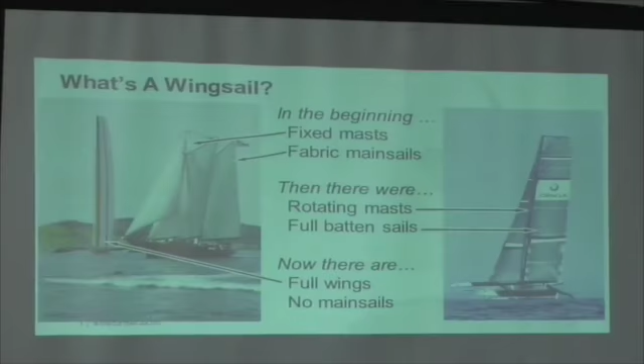So with a sloop rig, you basically have the mast, the mainsail, and the jib ahead of it. And then they went to basically taller cat rig, unit rigs, and the mast grew in size to be as much as 30% of the total sail area.

Then in the late 60s and early 70s, they started trying to make it more like an airplane wing, experimenting with a single piece wing that could be distorted to sail on both tacks. Then the real breakthrough came in the late 70s, where they went to rigid wings comprised of a number of symmetrical airfoils in tandem that, when deflected, formed slots.

These form slotted flaps just like you see on an airliner when it's landing. When you look out and see those, the wings sort of fall apart into a whole bunch of different pieces. That's what the wing is like on these C-class catamarans.

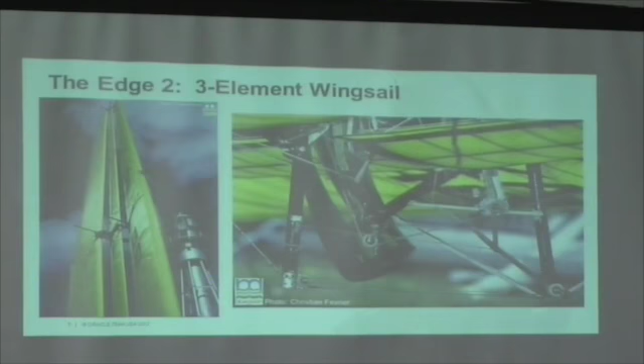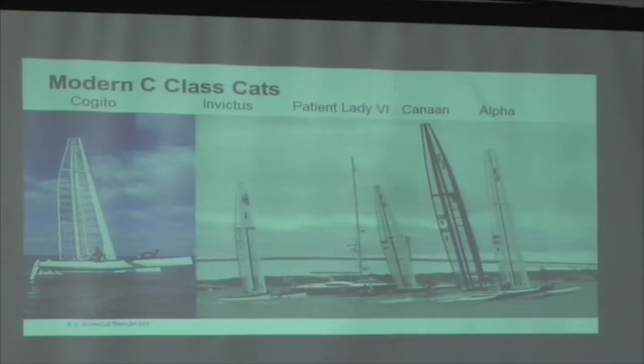And Canaan is the current holder of the C-Class championship - she's a Canadian boat. And Alpha is a little bit older Canadian boat that first won the championship from the United States and brought it to Canada.

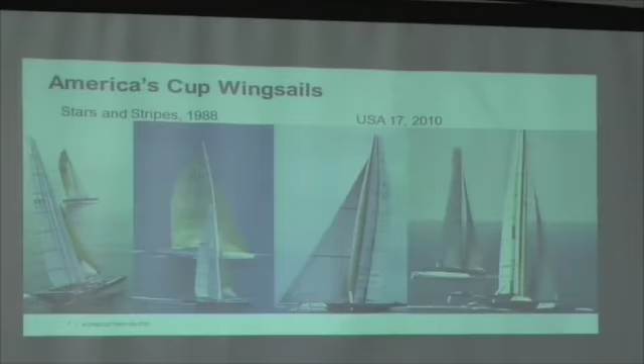In the front is the main element. It basically does the same role as the mast, and carries most of the lift. Behind it are the flaps, hinged just ahead of the main element trailing edge so they form a slot when deflected. The flaps are divided into several segments up and down the span, which makes it easier to assemble the wing, and they're individually controlled to control the twist.

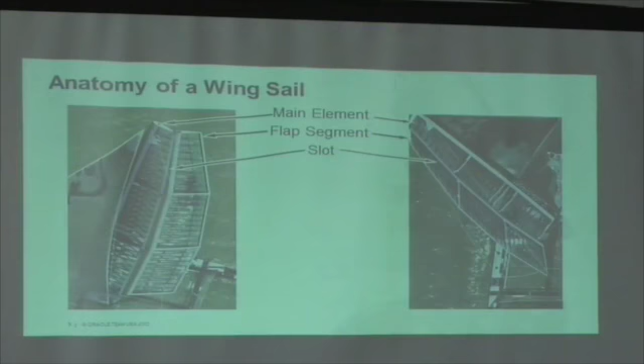Finally, the entire wing is rotated with what we call the traveler—really it's the sheet. The wing sits on a ball, just like on a Hobie cat, and the whole thing is rotated by the traveler. Because there isn't the high tension you have with the main sheet, and the traveler is just horizontal, it's very lightly loaded.

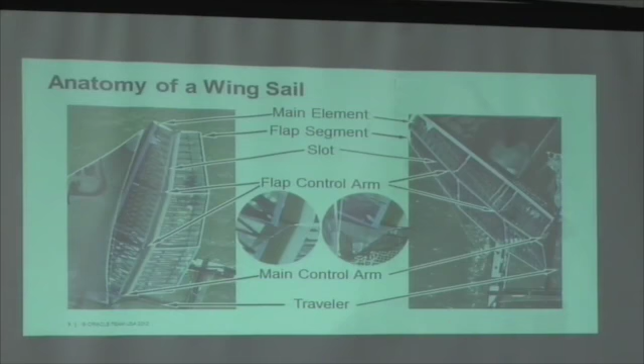Even on USA 17, it was just a 2-to-1 purchase to a fairly modest winch, and it's only a single purchase on the AC-45. So it's very easy to trim these wings in and out, and that's the key to making them highly maneuverable—you can turn the power on and off in an instant.

If you take the wing and slice it horizontally, shown in the upper left, you basically get these two teardrop sections shown here. The first is the main element, and the second is the flap. On some wings there's a third piece, which we call the tab, like a plane flap that can be articulated between the main element and the flap.

You can see in the second diagram how the slot is formed when the flap is deflected, and the tab can regulate the size of that slot. Not all wing sails have a tab—USA 17 did not, and the AC-45s do not. But I expect you'll see them on the AC-72s when those start sailing.

So you have basically 3 controls to the wing. You have the traveler rotating the entire wing, the camber control which controls the flap angle, and then twist, which is really the difference between the angles at the bottom and at the top. You can have twist in the flap, and you can have twist in the main element, though not all wings have the ability to twist the main element.

The AC-45s do not, and USA 17 did not. You may or may not see twist in the AC-72s—I don't know what these wings look like yet.

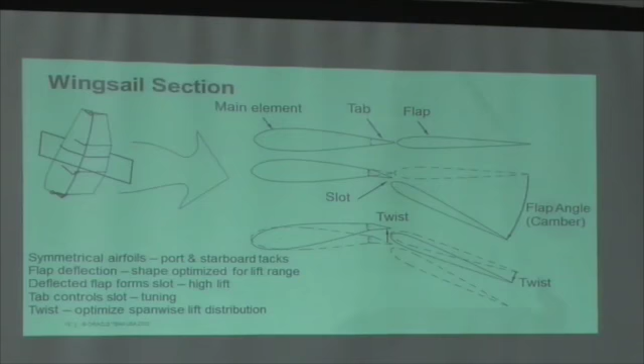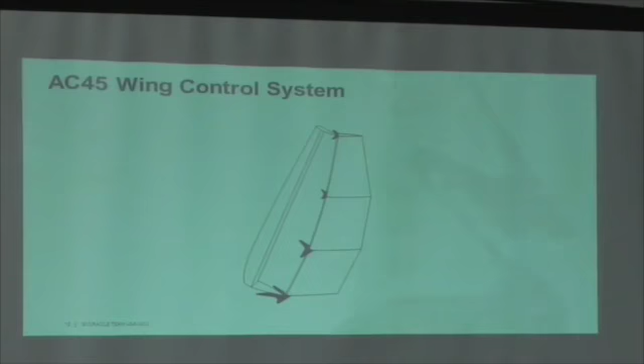Let's take a look at how the wing control system works. What I've shown is that same wing we saw in the helicopter shots. In this drawing, I've removed the frame so you can see the main spar and the control arms on both sides. At the bottom you have the main control arm, and at the end of each flap segment you have that flap's control arm.

Now the forces on the wing: you have the lift pushing sideways, restrained by the ball, by the stays, and by the traveler. These are all basically pulling sideways on the wing at the edges, and as a result, the wing just naturally wants to fold in half. But it's prevented from folding in half because there is a control line from the center of the main control arm to the main element, and that limits how far it can rotate.

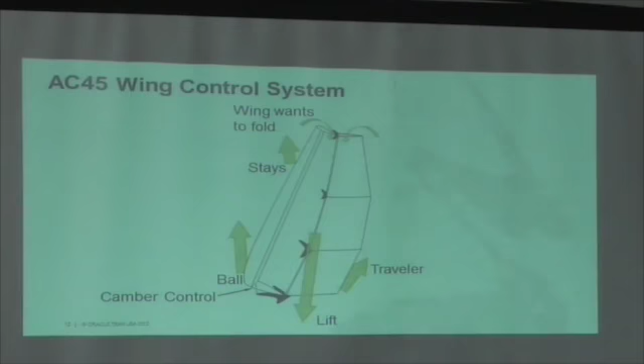That's how we control the camber—we simply regulate the length of that line. It just goes to a cleat, and the beauty is that it's self-tacking. When the forces reverse themselves to the other tack, the wing simply folds in the opposite direction, and the same setting on the camber control line limits the amount of rotation of the flap.

Now, that basic control controls the bottom flap. Linking the bottom with the other flaps are the control lines. The control lines from each of the flap control arms go down the main spar and then back to the control arms on the main control arm.

But the wrinkle here is that they cross over. The result is that when the main control arm on the leeward side moves back, it pulls forward on the windward side control arms of all the other flaps. And likewise, on the windward side, when that main control arm moves forward, it feeds slack into each of the other flap control arms. So in this way, all of the flaps are slave to what happens at the bottom.

And so that one camber control setting for the bottom flap really controls the camber up and down the entire span of the wing.

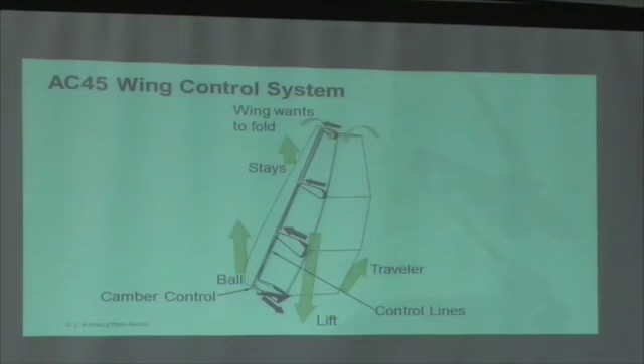Now here's what that looks like on the AC-45. We're looking at the bottom of the wing, and you can see this is the main control arm. Here's the flap, and this is the main element. The camber control line goes from here to the main element, and these are the control lines for the various flap segments coming down the mast.

Now, they don't actually end right here. Instead, they carry in to this sector, and that is the twist control. So what the twist control does is it basically, you can let it rotate, and it will feed slack into the upper control lines, controlling the top part of the flap, and let the flap twist off to leeward.

And it's restrained by a control line right here. It works just like the camber control to limit how much it rotates.

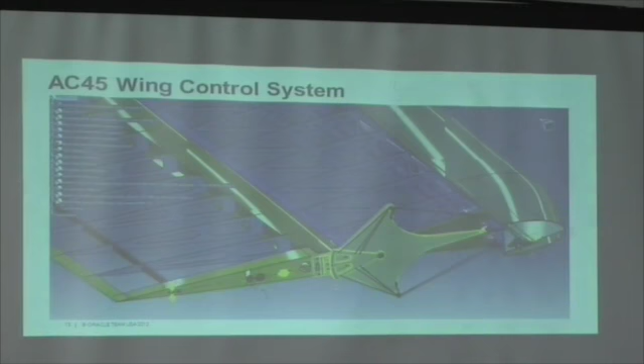So you basically just have these very simple controls. You have the traveler, you have the camber, and you have twist. And that controls everything there is about the shape of that wing.

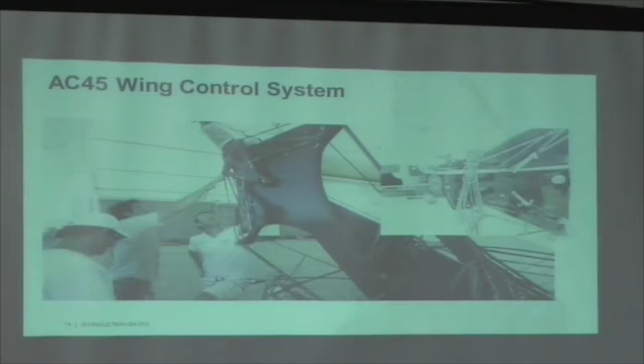And here's what it actually looks like in practice. Again, main control arm, the twist quadrant, the twist tackle is underneath here, and you can see the line here. And that's it. It's really quite simple and elegant. And this system, this approach, was basically developed by Dave Hubbard.

So now let's talk about the aerodynamics of the wing and how these various controls contribute to the performance.

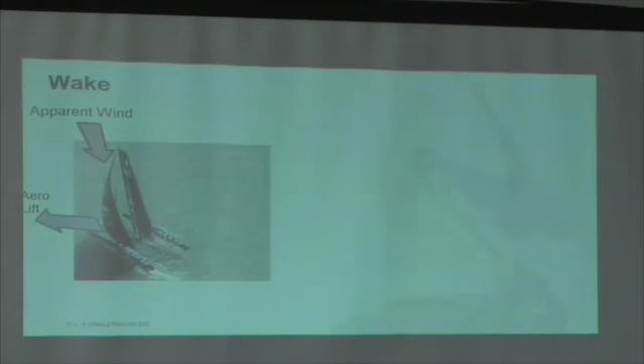Now, the lift is generated by the rig deflecting the wind to windward. And so it leaves this vortex sheet behind it, which is formed because the wing is only deflecting the wind over a finite span. So around the edges, the wind has to come in and replace the air that's been deflected. It's just like a giant canoe paddle pushing sideways, and you get the same sort of vortices around the edges of a canoe paddle.

Now the effect of that, so here's what that actually looks like in real life. Right here is a Volvo 70 leaving Cape Town in a fog bank. And you can see the wake that's left by the boat and how this vortex rolls up. And the wake goes for miles behind the boat. It's really quite remarkable.

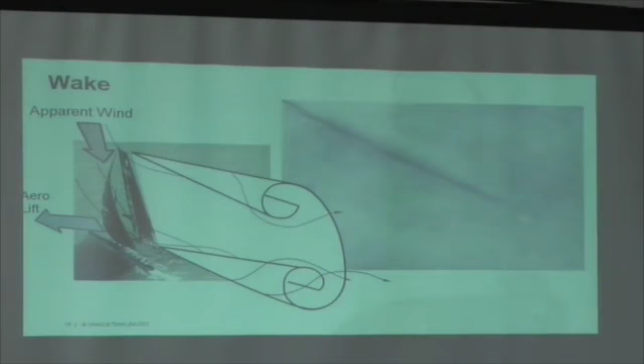Now, half of that deflection of the wind to windward is felt at the rig itself. And because of that, that deflection of the wind due to its own lift, it's as though it's had a local wind shift right at the wing. So you could say that the boat sails in a header of its own making.

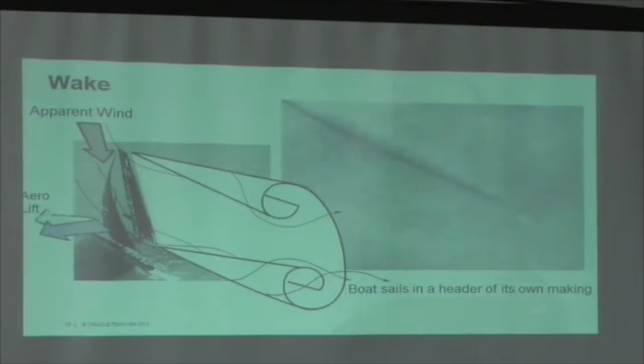And so if you think about the lift as being at right angles to that, it's rotated aft. And so in sort of the lift-drag bookkeeping, this looks like you've added a drag component compared to the original lift. And we call that induced drag. And it is in fact the largest component of aerodynamic drag on the boat. And minimizing that is really what sail trim is all about. And that's why control of the twist is so important on these wings.

As designers, what we do is take a look at how the wind is deflected in a plane that's perpendicular to the wake, and we use that knowledge to design the planform shape, the span, and the area of the wing. Then we have another plane that's a horizontal cut through the wing, and we use that to design the cross-section shape. So we take this complex three-dimensional design problem and turn it into two much simpler two-dimensional design problems. That's basically how we come up with the aerodynamic design for the wing and the sail.

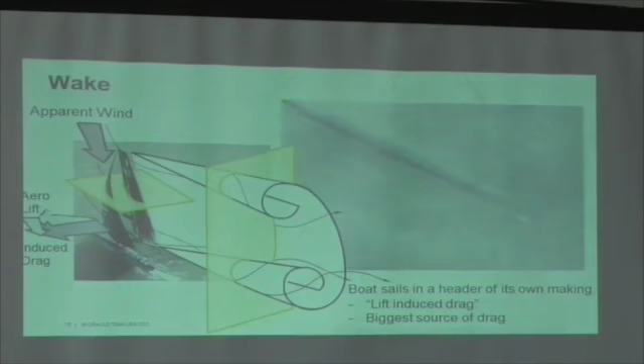So here's what the two-dimensional section design looks like. Again, you've got the two teardrop shapes: main element and the flap.

On the left is a plot of the pressures around the wing. The blue curve is the leeward side on the main element, the yellow is the leeward side on the flap, the red curve is the windward side of the main element, and the magenta is the windward side of the flap. The difference between those two areas represents the lift.

You can see that most of the lift is carried by the main element, and most of it is concentrated near the leading edge. On the right, it shows the grid that we use to compute this.

The grid is fitted to the streamline, so those horizontal lines are parallel to the flow around it. And you can see here where the flow comes into the dividing point.

All this air goes around the lee side, and all of this air goes around the windward side. There's a similar dividing point here on the flap, and all of the air here goes through the slot, while the air here goes to the windward side of the flap.

The final graph on the bottom left shows the distribution of aerodynamic drag around the entire section. You can see there's very little drag on the leeward side - most of it is on the windward side, especially near the leading edge, which is why designing the leading edge and its condition is so important to performance.

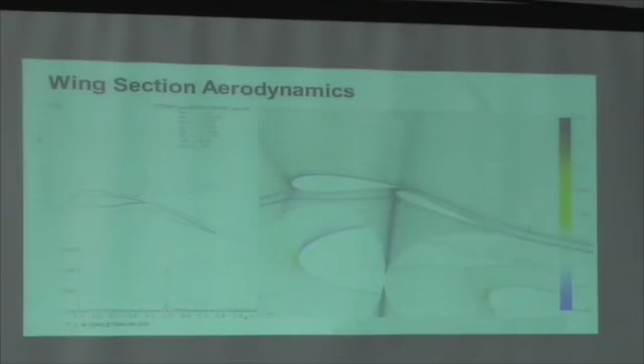Now what I'd like to show is that the flow is not quite as smooth and steady as it looks. Here's a computational fluid dynamics calculation where we did it down to the scale of the turbulent eddies.

You can see the turbulence that's shed off of the windward side going through the slot, and the wake from the main element trailing over the flap, and how the turbulence gets amplified as it goes over the flap.

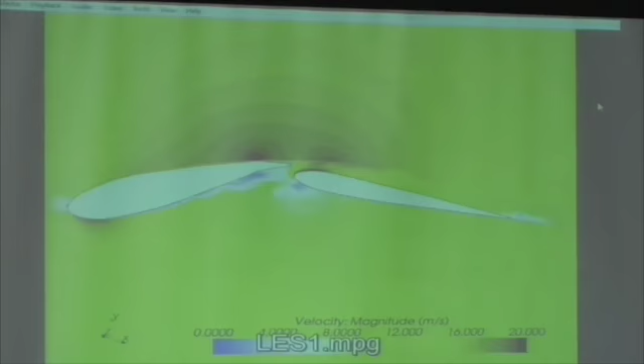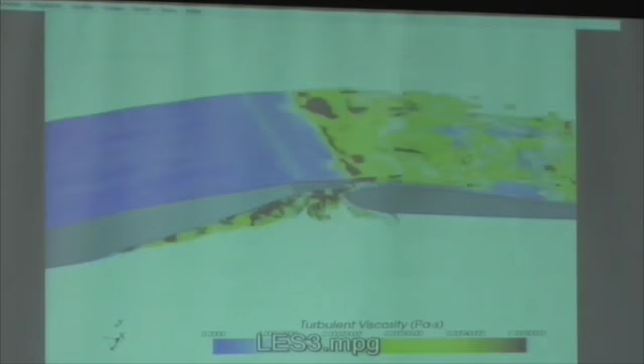Here's basically the same thing from a little different view. You can see that the turbulence is not only unsteady in time, it also varies widely along the span of the wing. So the real flow is quite complex.

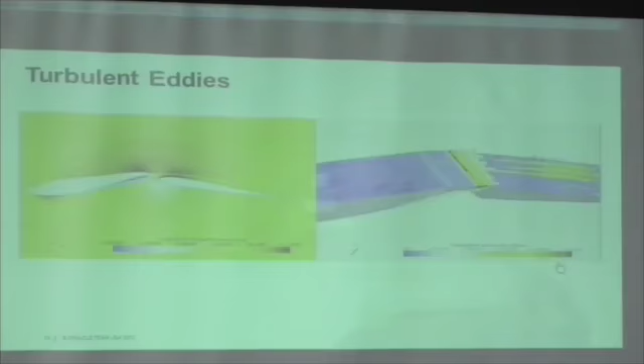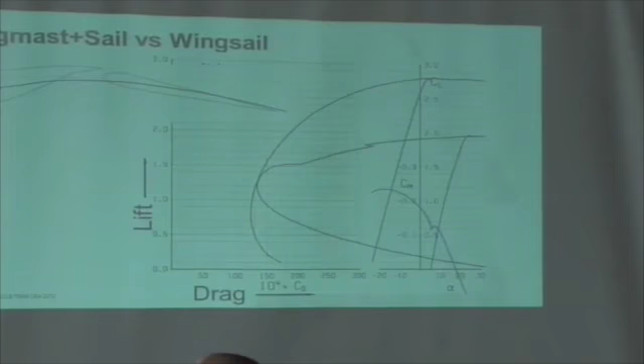Here is a plot of the lift and drag. On the left is plotted vertically the lift versus the drag. On the right, the two curves are lift versus angle of attack. So you can see there's quite a difference in performance between the two.

There is an area where they have very comparable performance, but the big difference is that the wing sail rig has a much higher maximum lift, about a third more than the soft sail rig. It also has a minimum drag, and the beauty is that its minimum drag occurs at a lower lift, and its best lift to drag ratio at a higher lift than the soft sail rig, which makes it a much more versatile rig.

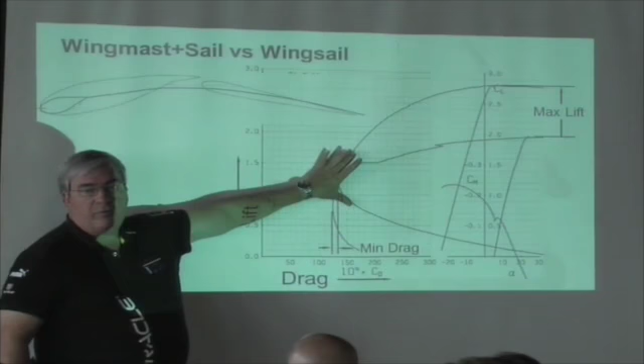You can see that there's only really a narrow range here where the soft sail rig is performing at its best, whereas the wing sail has a much broader groove, so it's a much more tolerant sail in terms of its performance.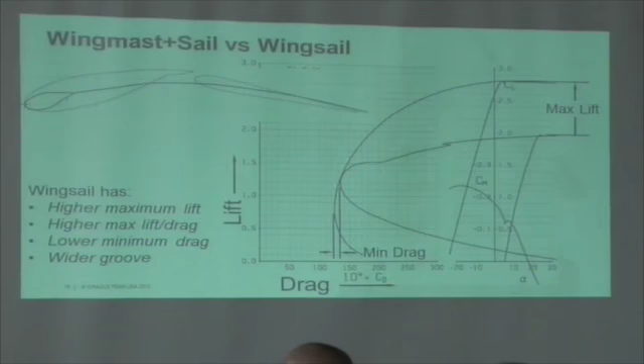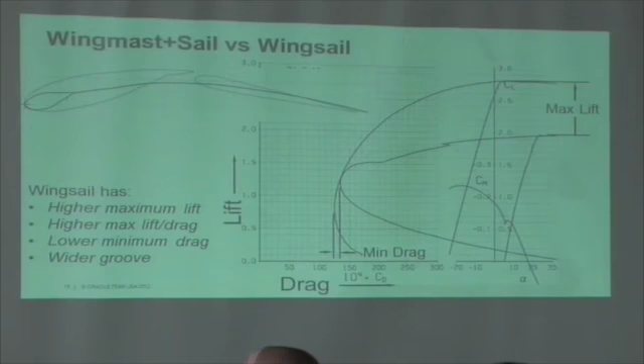So here's what it looks like in three-dimensional computation. This shows the AC-45 sailing upwind at about 14 knots of wind, and the flow is attached pretty much everywhere on the wing and on the sail.

There's a separation bubble right here on the windward side, just ahead of the trailing edge before the air goes through the slot, but that doesn't cause very much difference in drag.

At the bottom, you can see how the flow is already starting to head down and around the foot, to roll up into the vortex at the bottom. But the really important part is the graph on the right, showing the distribution of lift from top to bottom. When you combine the wing with the soft sail jib, you get a nearly ideal shape to that lift distribution, minimizing drag for a given heeling moment. That's why the combination of sail and wing works so well on these boats.

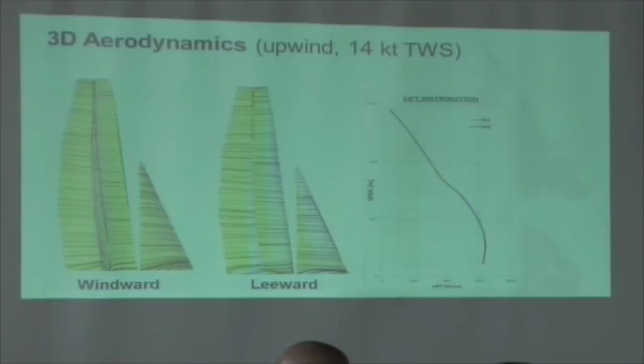I'd like to show you what that looks like in three dimensions. Here we have a line of streak lines in a plane starting very near the water surface, and this is going to sweep up the rig. You'll be able to see how the wake forms at different levels and get an idea of what the airflow is like around the whole platform as well as the wing.

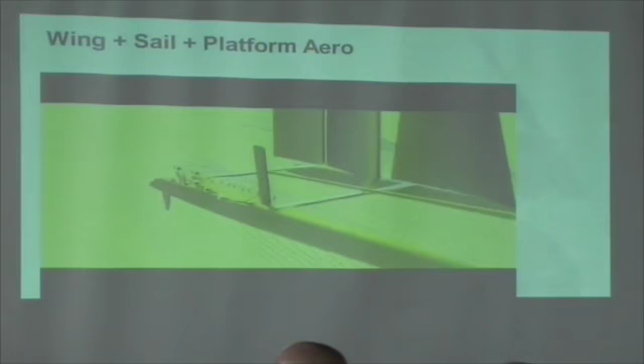Notice the distortion—the dagger board is raised.

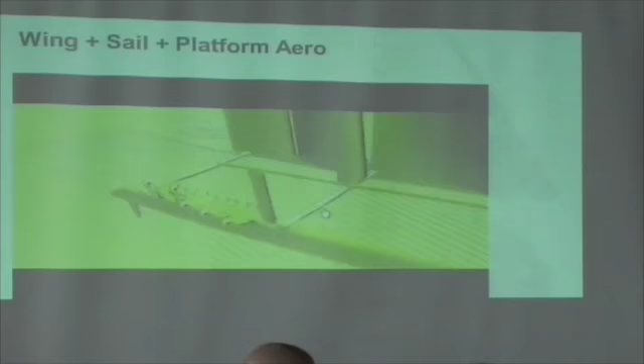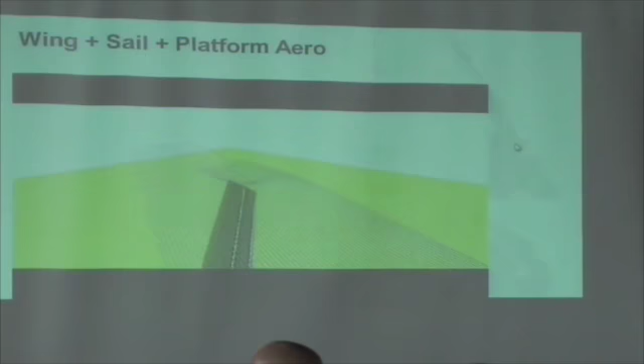So to put it all together, as a designer, what we're trying to do is get maximum lift and minimum drag out of our wing. The lift is limited largely by the heeling moment of the platform. Once you start flying that hull, you can't stand any more load on the wing, and you're basically capped.

My teammates are showing me up here. So just like that boat that sailed by, you're limited at how much moment you can stand. That's right, that's right—you like my visual aids here?

That's limited basically by the template in the AC-72 design rule, so we're basically limited in what we can do there. The other thing that limits maximum lift, especially in light winds, is aerodynamic stall, which is largely a function of the section design—which, as you've seen, drives us to the slotted flap. That's limited in the design rule by what's called the half-girth rule, which basically limits our ability to use things like follower flaps and other devices that would change the area of the wing.

Now, minimum drag—as I mentioned, the big thing is to minimize the induced drag. The taller you make a rig, the less the induced drag will be, but that's again limited by the design rule. So what we basically have left is twist, and that's why we have the control system we do, to control that twist. Then the profile drag of the section is proportional to wing area, again limited by the design rule, and the section shape. Here we have a bit more freedom under the design rule, but we're still limited by the flap angle the control system can create.

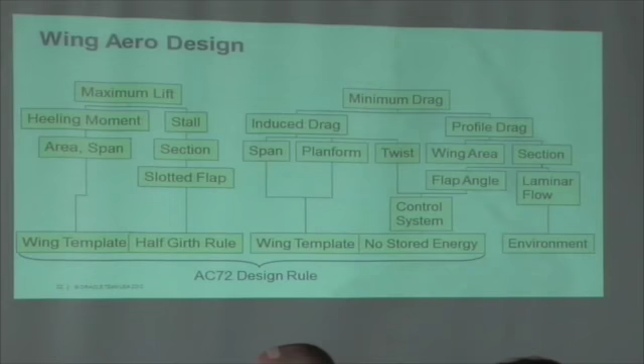So I'd like to wrap it up by reiterating why wing sails. The aerodynamics are superior to the soft sail rig—you have higher maximum lift and lower drag, which allows you to point higher and go faster downwind. The control system gives you precise control of the twist, so you can minimize that induced drag, and precise control of the camber, so you can minimize the drag for all the lift ranges you're trying to sail in.

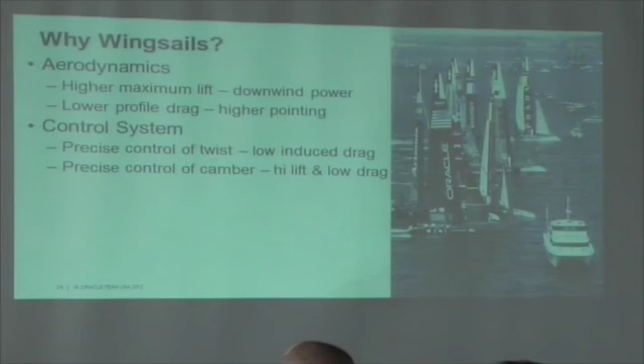And the structural loads are far lower than for a soft sail rig, because you don't have that massive mainsheet and vang tension—that allows you to take weight out of the entire rest of the platform. Finally, the instant on-off control of the power allows you to maneuver very adeptly, so you can take a 45-foot cat and take it around the buoys just like a beach cat.

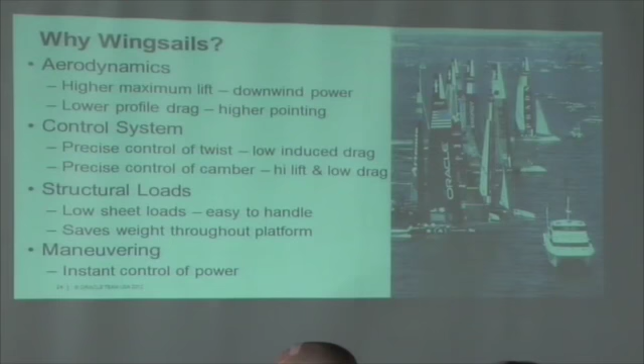What I'd like to show you now is the sailor's view of what it's like to sail.

This wing is identical to the wing we used for the last America's Cup. Today we're going to have a quick talk on how the wing works, what the wing is, and what it's made out of.

Here we have a two-element wing, so it's got a fixed front element, which is the structural mast, made out of carbon fiber. Back here we have the flaps. We have 3 flaps, 1, 2, and 3 from the bottom up. It's made out of carbon fiber with a Kevlar nose cone.

On every top of every flap there's a control arm. So control arm 2, 3, 4, and the bottom control arm is this one here right at the bottom. That sets also the camber, which is the hinge point, giving the camber all the power or deep power when you need it. Instead of a sail, the film is shrink wrap plastic, the same as you buy when you buy your meats in the supermarket. It's shrink wrapped on with sticky tape. Ours is black because we put paint on it. It is very strong this way, and it holds the pressure, but if you put a knife through it or something sharp, it will cut it instantly.